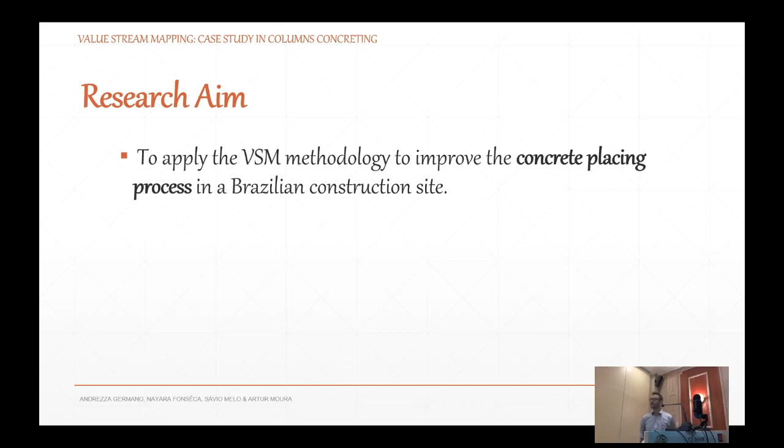So our aim is to apply the VSM methodology to improve the concrete placing process in a Brazilian construction site. We have followed 3 of the 4 steps proposed by Rother and Shook in their book, Learning to See. So first we select a process to map, then we map the current state, and finally we map a future state with some improvements.

So this is the project that we studied. It's a 23-story residential tower with 54 apartments, 2 units per floor. We mapped the concrete placing process of 18 columns of the second floor underground, which will be the parking space of this residential tower.

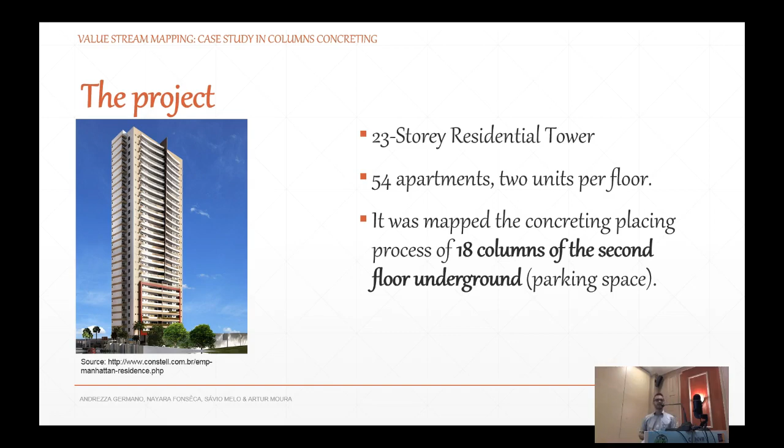So we start mapping the process, and the first 2 activities involved in this process were the concrete mixer truck arrival and the start of concrete placement. And as you can see, both of them were executed not as planned. The concrete mixer truck was planned to get on the site at 6:45 a.m., but it arrived there at 7:50 a.m. due to bad traffic conditions. And concrete placement was supposed to start at 7 a.m., but it started at 8:26.

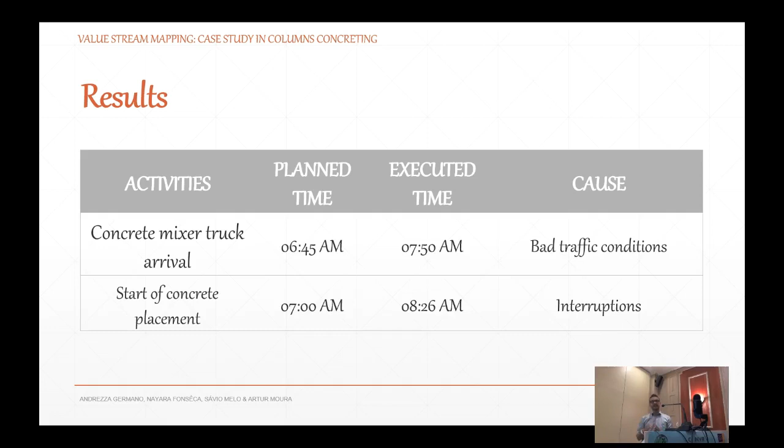And why didn't they start at 7 a.m., and what kind of interruptions occurred? So value stream mapping is a tool where we can identify wastes and improve construction processes. Applying this tool, we have identified several wastes in this construction project. The first one is related to waiting.

So the first type of waste that we identified is that when the concrete mixer truck finally arrived at the construction site, there was a backhoe preventing it from parking inside the construction site. So it needed to wait 26 minutes for someone on the construction site to get this backhoe out of the path, so the truck could drive into the right position.

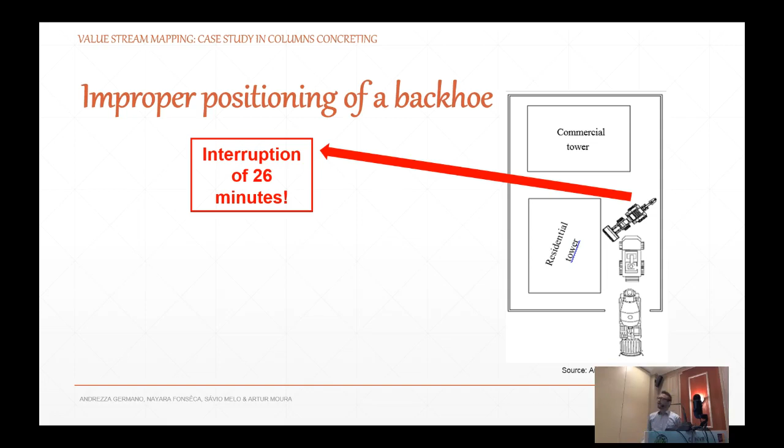The second type of waste that we identified was making do. We had some problems due to the truck's arm size. As you can see on the left side here, we have a brief representation of the 18-column formworks, and the truck arm can reach the ones that are closest to the truck. But for the columns that were far from the truck, the truck arm wasn't long enough.

So what they do is making do. I don't know if it's clear from this photo here, but the workers are using a wooden board, without success, to prevent the concrete from being thrown out from the column formwork. So they are trying to fill the column formwork with concrete, but this was a clear improvisation.

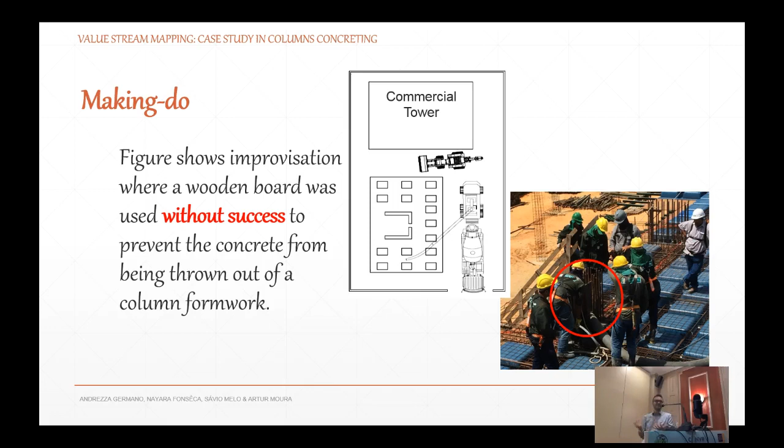And then, continuing the concrete placing process, we also found interruptions during the concrete pouring. As I just said, they were trying to use this wooden board, and then they realized that it doesn't work. So, okay, let's get an extension right now, so we can fill with concrete the columns that are far from the truck. And to get this extension, they took 30 minutes and 40 seconds.

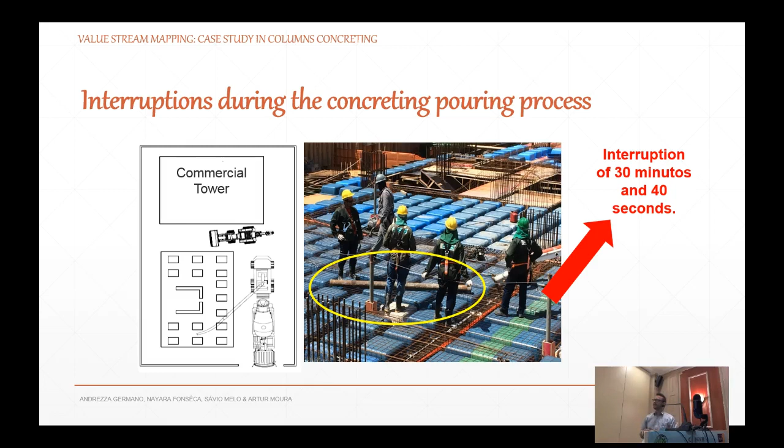And once they got this extension to concrete the column formworks that were far from the truck, another interruption happened. A connection between the truck's arms broke. So they stopped again for 22 minutes.

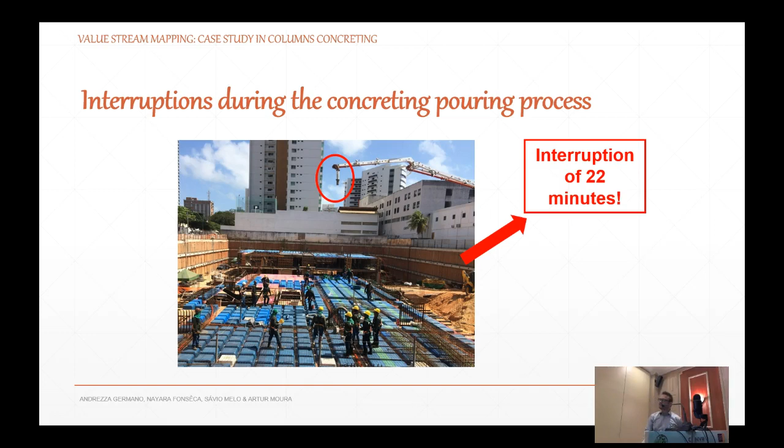And another one that we were very surprised at the time is that 4 concrete mixer trucks were ordered, each with 8 cubic meters. And then when we were there, we and the project team realized that only 3 concrete mixer trucks were necessary. So there was another kind of waste, overproduction.

So what did they do with this mixer truck? Without prior planning, they decided to fill with concrete other structural elements that were not previously planned for the day. So the total lead time for the process was 5 hours and 19 minutes, and the value adding time was in fact 2 hours and 4 minutes.

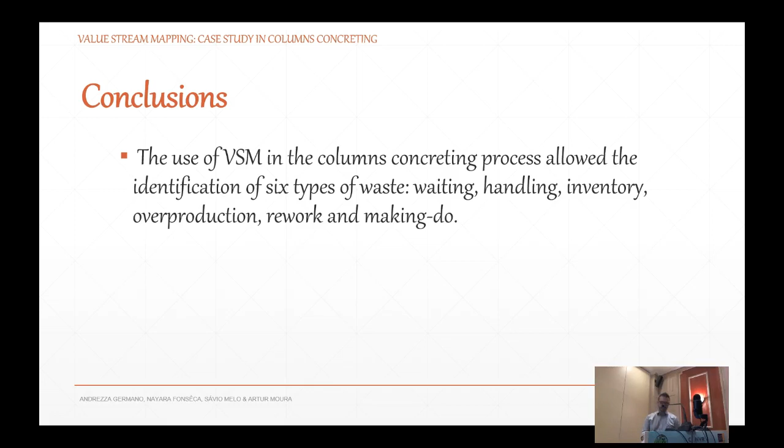So our conclusion is that the value stream mapping in the concrete process allowed us to identify 6 types of waste: waiting, handling, inventory, overproduction, rework, and making do. We also have some limitations because we did not map the activities that precede the concrete placing process. And as a future work recommendation, we suggest to elaborate and test an implementation plan for the future state map developed in this paper. That's it. Thank you.

I'm curious about something. First off, at the beginning, you said that you thought there should be more value stream mapping because there isn't very much of it in the literature, and I'm worried about that logic a little bit because it sounds to me like I've got hammers and somewhere there should be more nails. So I would be careful how you phrase that. But this has been my experience. I've done lots of value stream mapping. I like value stream mapping. I always think it's amazing. And every time I've been involved in a value stream map exercise, I've been horrified by the results.